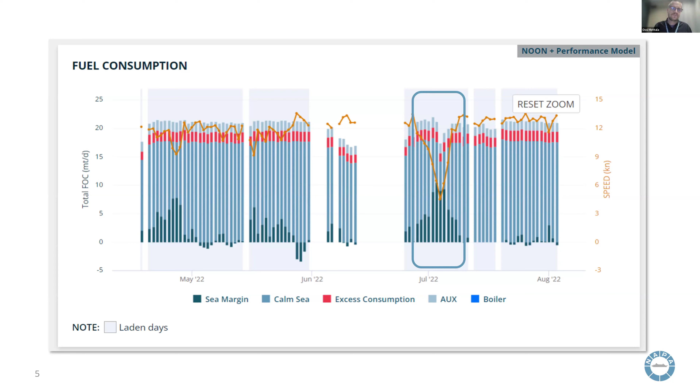Next, following up the trend lines of the vessel, here we have a consumption trend line, mainly hull fouling, and how over time, as we all know, the performance of the vessel does tend to go down. It's decreasing day by day, ever so slightly, and at some point there is a time for underwater hull cleaning, inspection, or dry docking.

Quantifying the impact and how much excess my vessel is actually consuming gives a lot of guidance for technical managers, for example, to make educated decisions on which vessels require my attention, where are the biggest influence gained if performing an underwater hull cleaning, for example.

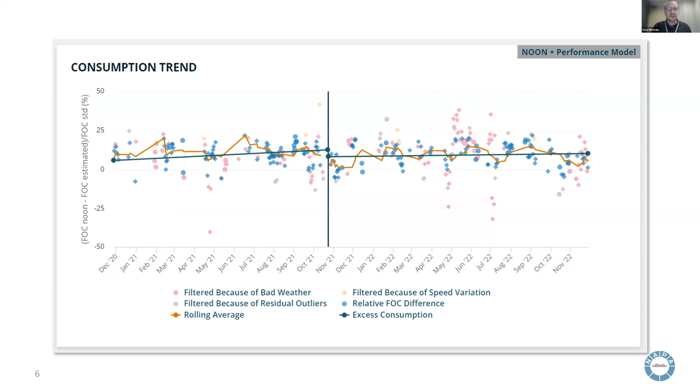We can see over time the trend lines have been growing. The vertical line, the breakdown around November 21, is a hull cleaning for this vessel and propeller polish. We can see immediate impact on the consumption has dropped on the trend line.

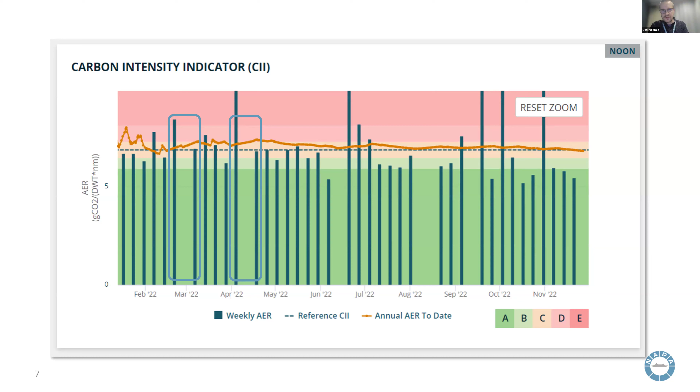If the vessels remain stationary for a long period of time, it means it is still consuming without covering any distance, thus directly hurting the CII rating, and also increasing the risk of hull fouling, the growth on the hull. So the best medicine for the CII is to keep operating constantly.

When it comes to optimizing the operation of the vessel, weather routing has a key part, not only for reducing consumption but also improving your CII rating. This weather routing is almost like attacking CII from two different angles. First, the weather routed routes are often longer, while the overall emissions are lower.

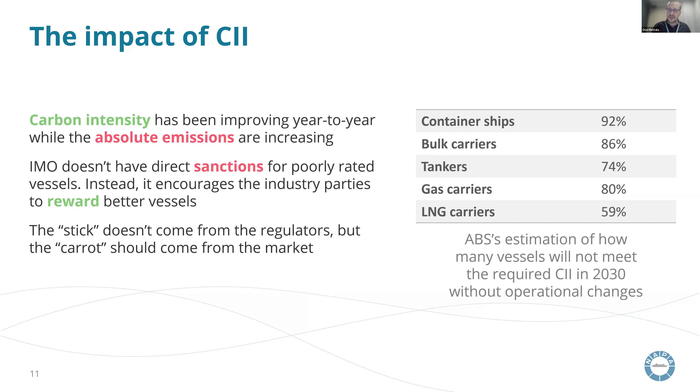But then what are the market mechanisms to improve on this? As we've heard in the news many times, the acceptance of the CII rating clause in time charters has been quite poor, and it was late 2022 when BIMCO released its CII clauses, which wasn't exactly well received either by charterers or owners. In the end, the beauty of CII is its simplicity, but that's also its curse - it doesn't consider off-hire, ballast voyages being much better than laden voyages, etc.

But as we know, the importance of Scope 3 emissions has been growing, and it's expected that cargo owners will start to demand better CII rated vessels when transporting their goods. So in the end, it is transparency that is the key for CII success.

When improving the CII, it should only be a byproduct of improved operational efficiency and reduced emissions - when a measurement becomes a target, it usually ceases to be a good measurement. So step by step, with increased transparency, we can generate more demand from cargo owners, which is an incentive to add the CII clause to charter parties. That creates incentive for ship owners to improve technical aspects and for charterers to improve operational ones. Those result in reduced greenhouse gas emissions, and in the end, the CII rating will improve.

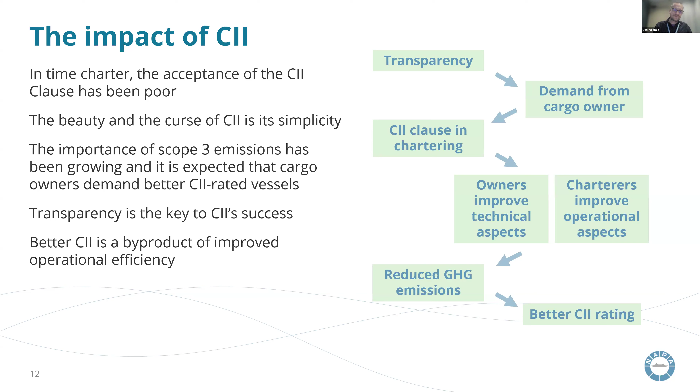So my final takeaways. Operational improvements are a big part of the solution. We are still waiting for alternative fuels to break into the market. DNV estimated that 35.4% of the results in getting to the IMO 2050 target comes from operational improvements.

The acceptance of CII has so far been quite low, and it is not yet an integral part of charter parties. Finally, CII is just a yardstick to measure efficiency - it's by no means perfect, but the motivation to reduce greenhouse gas emissions should be the primary target, not reducing the CII rating.

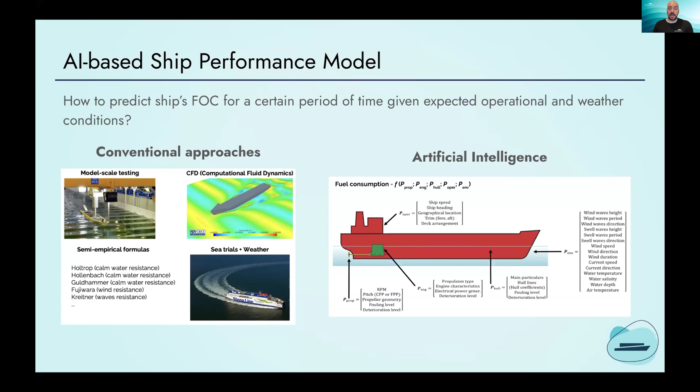And this is what we believe is one of the key advantages of AI: the added accuracy from these types of models. There are two types of models that we're developing at Bearing. One is the ship-specific model, and it uses the historical fuel consumption data, AIS data, and the weather data of multiple voyages of a single ship in order to create a model that is capable of predicting fuel consumption for

that particular ship. Now, it's important to stress here that this type of model is applicable only to the one ship it was trained on. It cannot be easily extrapolated to other ships because it's intrinsic to that particular vessel. So we basically need historical data from that vessel in order to create and use this type of model.

These models can be very accurate depending on the quality of the data that they're trained on, the size of the data set, etc. But we have seen in practice accuracy above 98% in predicting fuel consumption using these types of models.

Now you might wonder what happens if I want to see the fuel consumption of a vessel that I don't have any historical data for, either because it's a vessel that I just chartered in, or for any other reason data is missing or has not been collected. For those cases, Bearing has created something that we call a universal model. A universal model is capable of predicting fuel consumption for a vessel that we have not seen any historical data for.

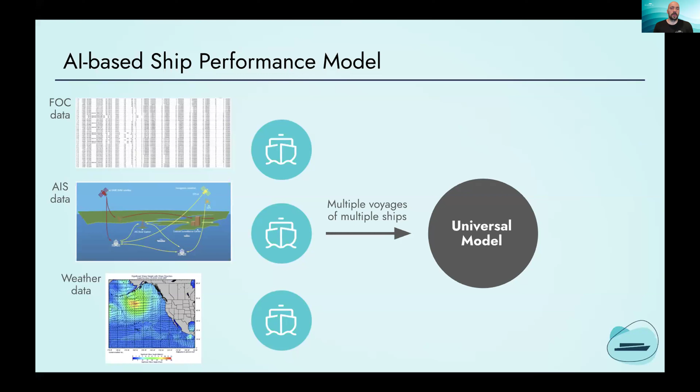Basically, it was trained in a similar way as a ship-specific model, but on data from many vessels. So not on data from one vessel, but on data from many vessels. And by doing so, we have created a model that can input any ship characteristics, any ship parameters, and obviously expected operational conditions, and output the expected fuel consumption.

These types of models are naturally less accurate than the ship-specific ones. Our experience is showing accuracy in the range between 90 and 95%, usually in the lower part of that range, around 90, a little bit higher.

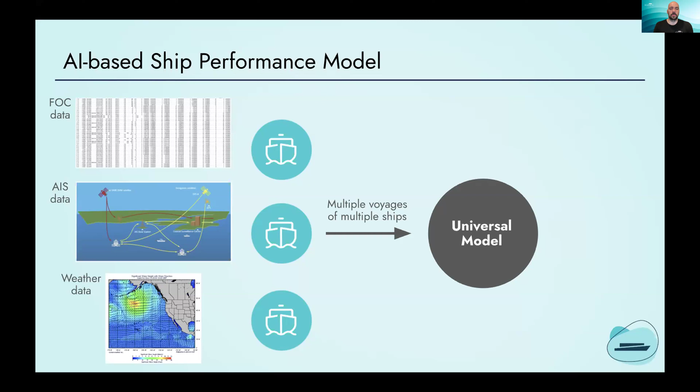And that's kind of a natural consequence of the fact that the details of the ship characteristics cannot be captured without training on the historical data of the ship. But this is nevertheless much higher than what the conventional models would output in these scenarios. All right, so that's a couple of words around the ship performance models.

Then we go next to the large maritime model, LMM, that I was mentioning Bearing is using for the prediction of the pattern of a vessel for a certain period in time. Again, for a liner vessel, this is in a way trivial if you know which service the vessel is going to be deployed to. So there is not much complexity around that, although there still is some,

since in reality pro formas of services of liner shipping companies are not reflecting the actual reality that the vessel is going to encounter in terms of the weather, the routes between ports, the speeds, etc. So there is some complexity there, but the real complexity comes in predicting operations of tramp vessels.

So what we're doing here is building a technology that is based on the same principles as the latest large language models behind ChatGPT and similar services. So it's basically around generative AI principles and methods. We are creating a model that inputs historical behavior of the global fleet, all the vessels in the world's fleet, using AIS data.

We are inputting historical weather patterns, and historical data around global movements of cargo and goods. And we're training a model using that data. The purpose of the model is to predict movement of a single or multiple vessels over a certain horizon of time in the future. Of course, this is very difficult to do. And the longer the horizon is, the less accurate the model becomes.

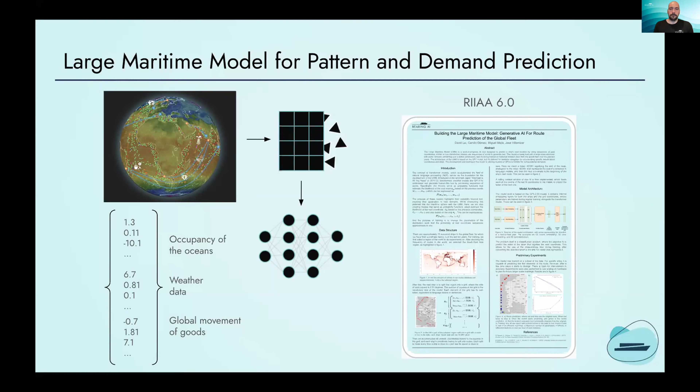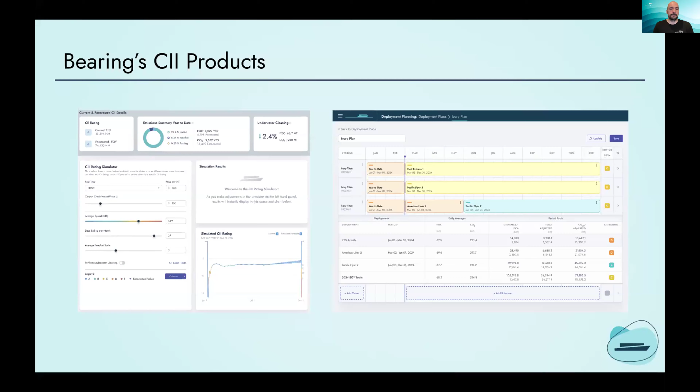I'll take you through a presentation looking at mastering your fleet CII rating. So we'll look a little bit more into the background, understanding the CII levers, and showcasing what solutions we are providing to the market in terms of managing the CII rating. Just to give you a little bit of background about the company, NAVTOR is today serving around 1/3 of the merchant fleet in the world. So we have a fairly large customer base. Our vision is to be a force of innovation and always be at the forefront of the technology, helping the maritime industry towards a safe and sustainable future. So it means that we of course support a lot of products relating to safe navigation, but also supporting sustainability, which CII falls under.

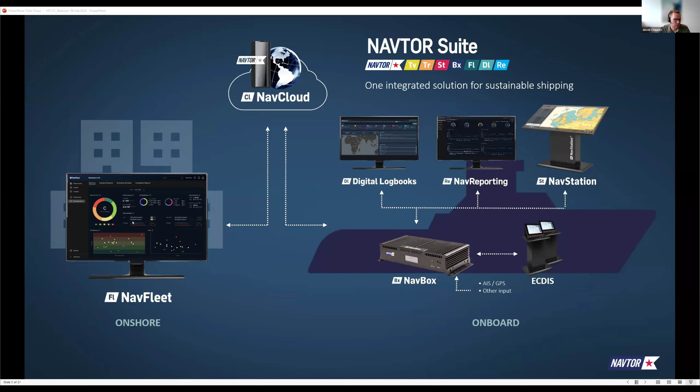And to give you just a brief overview of the solution, we have one onshore solution called NAVFleet, and then we have a cloud solution to sync all the data from our onboard solutions, which is very comprehensive, covering everything from digital logbooks, noon reporting, our nav station, planning station on board, with all data layers connected to ECDIS, and synchronization of all the data, voyages, and so on into our ecosystem. So this is what we do. I will be mainly talking about NAVFleet and the intelligent solutions we provide mainly on the shore side.

So about the CII, just to give a brief background. A lot of people may already know it. It's basically based on collected 2019 baselines. Then there is a 2% reduction trajectory from that.

And then ships are subject to CII rating. They need to, you could say, incorporate this in their SEEMP Part 3. So they need to have a prediction, of course, over the course of the next 3 years, and have an implemented plan for achieving the required CII. So if you're not complying, then you need to have a plan.

I think, as Ossi mentioned, there's not a hard enforcement, but I think it's more the market that would require tonnage that is in a reasonably good rating, so C level rating or better. And of course, the lower figure you have, the higher rating you achieve. So the lower the CII or AER figure is, the better it is.

There are, though, some financial incentives, of course. Some of our customers are signatories to some of these. There are the Poseidon Principles for financing of fleets. Another one coming up is for marine insurance, and this is all about managing your fleet's alignment. So the overall fleet rating determined by a certain system is following a reduction trajectory.

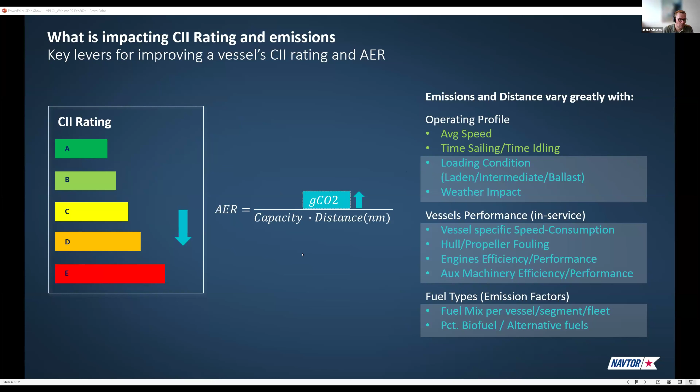If we then look at the solutions we are providing, we are leveraging our emission simulator, our voyage estimator, and an emission and CII dashboard. The emission simulator is very much about the more long-term planning, so planning for a certain outcome. If you want to end up at a given rating at the end of the year, there are multiple levers you can pull to get there. What we can provide in the emission simulator is different ways you can change your operation or your strategic deployment, utilization of assets within the fleet, to get to a certain point.

The other is the voyage estimator, which is more about when you're about to execute voyages, how you execute them, what route you're taking, speed profile, the loading and unloading conditions, the weather impact, and having a clear idea between owners and charterers, so you have a shared view on what CII rating this will end up being, and what the emission cost would be for this.

The other part is the ongoing monitoring. So we have a number of different emission and CII dashboards.

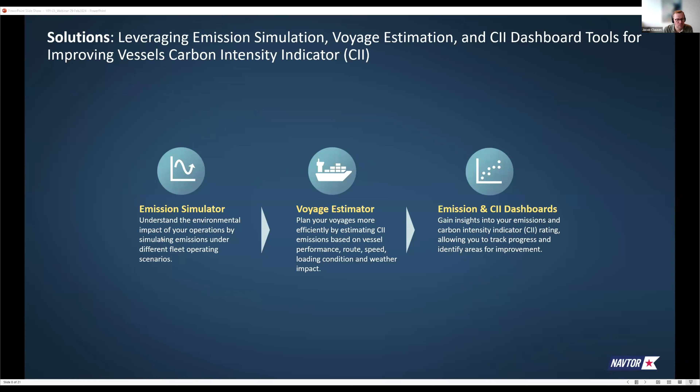So not only looking at CII, but also looking at other emission KPIs. So of course, on an ongoing basis, tracking where are we heading, how is the CII changing for certain vessels, and diving more into that. So in the next part here, I'll jump a little bit more into these in this sequence. And of course, this is kind of circular. When we collect all the data, it goes back to the emission simulator and is utilized again.

So our emission simulator is about harnessing the vessel-specific models we have and the historical data to determine the CII ratings across diverse operating scenarios for both the fleet or the vessel. So the starting point is that we know from history how the fleet is operating, its operating profile. So we have that as a starting point. This is what Alexander called business as usual. If you continue not changing anything, projecting out to the future what you're doing right now, we can predict where you will end up.

The other part is that for a given segment, we have some MR tankers, so they are grouped under MR. So for each segment we can set specific changes. And for this case, we have selected one vessel here where we change what the speed profile should be. Could also be the sailing or utilization. We can change the fuel blend utilized. So we can do that either on fleet, segment level, or vessel level.

So it could be that you have one vessel that you see is not performing. It may just be that it's outdated or old and has less efficiency. So you may want to apply a different strategy for how you deploy that vessel to still maintain a certain level of efficiency. That you can simulate by picking it out and changing just that specific vessel in the simulation itself as well.

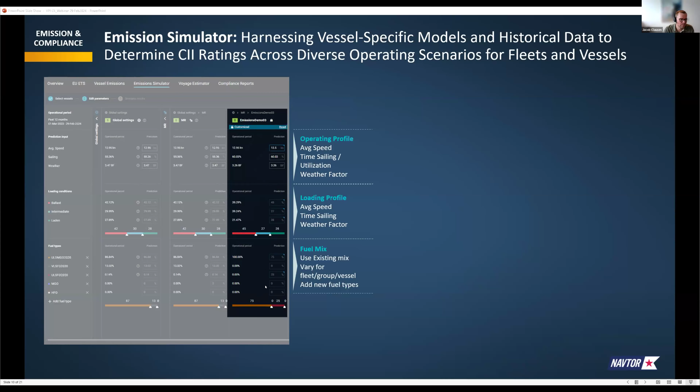And the outcome is that when we have inputted which vessels we want to simulate and the operating profiles to be applied, we then get a prediction on the fleet level, so we can see how the CII rating will develop over time. We can also see a forecast on the annual efficiency ratio, which goes into your Poseidon Principles and so on. We can see some simple emission metrics here that we can also, of course, export.

If we drill a little bit more into the individual vessels, then we can see what will be the rating for individual vessels over time. How will they develop? Because they each have different ways of performing. So we factor in each specific model here, and we can give a prediction out, and you can of course also export.

And for the individual vessels, of course, we can also dive into selecting a specific vessel. We can then look into how this is developing in the projection of what it's going to be doing in the future. Here we also factor in a certain efficiency degradation over time. So there are different levels we can look into.

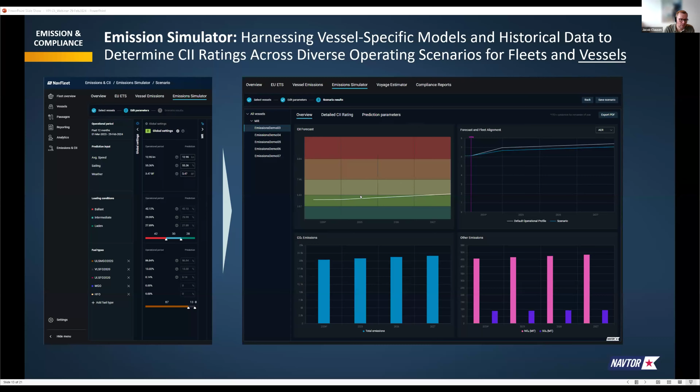Finally, if we want to create several different scenarios and then compare them, it could be that we change certain things so we can see how that would end up, how the rating distribution would be different from year to year, and what it would do to our fleet forecast, our fleet alignment in general.

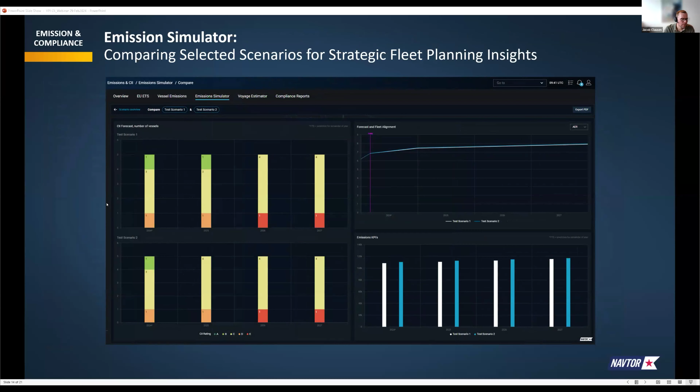Next, I would like to jump to the next part, which is the voyage estimator. So this is very much about analyzing the speed, leveraging the vessel's performance models, and then also evaluating different fuel mixes. So you can add and change the fuel mixes being utilized. The basic input is that, for a given vessel, you select the voyage itinerary and the expected departure. This is of course also relevant in terms of the CII rating, ETS, and so on.

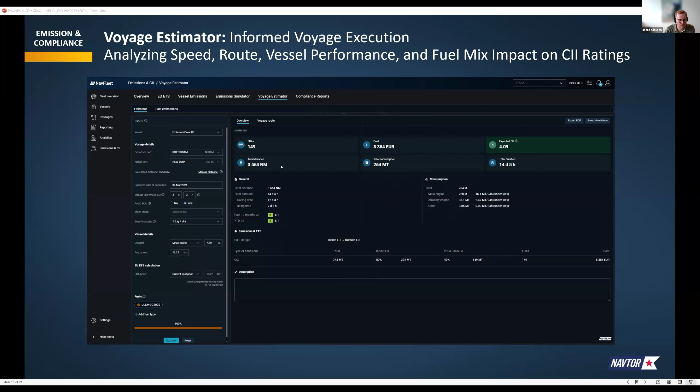A loading condition, and then you have the ability also to say how much idling time it would have. You can also specify if you want to have any EUA costs calculated here, and then of course the fuel mixes, and that gives you your expected CII for that given voyage, as well as EUAs and voyage cost in general.

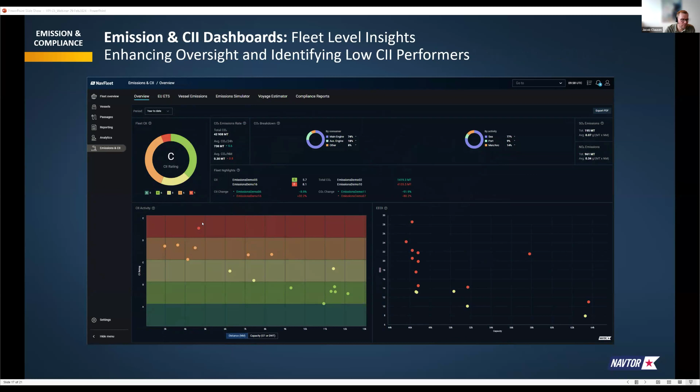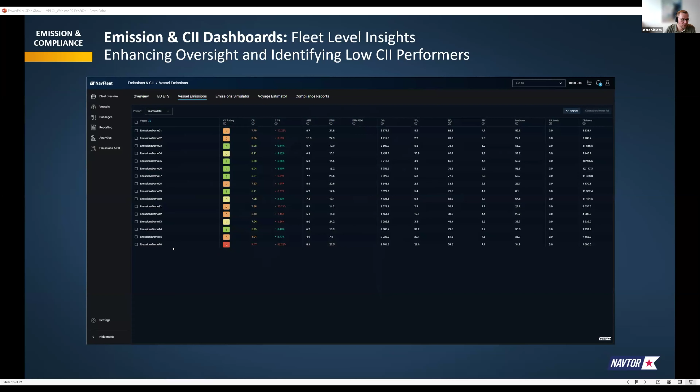The other part we do on the monitoring part is we have an overall fleet dashboard that states, like, it could be the year to date, but we can of course dive into all kinds of different periods of time. This is just one brief overview snapshot of how it looks for a given period of time. Of course, we can drill down and provide more metrics for each individual vessel to make it more specific, and also dive into the low performing.

So this is, all in all, some of the tools and solutions that we provide from NAVTOR's side, and that of course connects up with our ecosystem. So that's all I had for showcasing today.

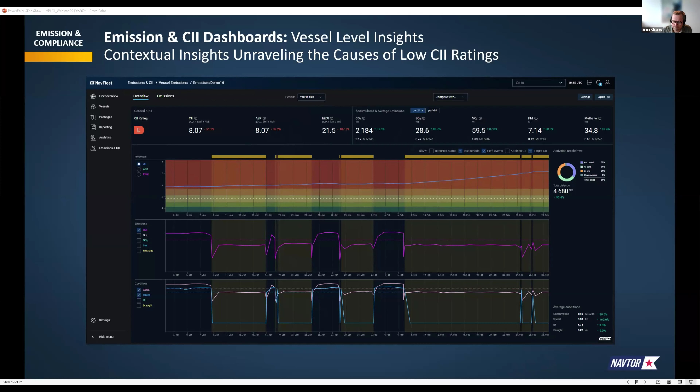I think we've got a question from me. I don't know anything about what the shipping industry is doing with CII. I don't know if anybody is able to talk in generic terms without revealing any secrets, but did you see a massive uptake in customer interest? There's an interesting comment that if your score is a D in August, you're screwed for the rest of the year, which I was quite shocked by.

I imagine lots of companies would be shocked; they probably thought they could get out of any difficult problem in the last month. I don't know if anybody is able to talk about what's happening in the industry in generic terms and how companies are dealing with digital technology. Are they getting the answers and the scores they want? I know it's always tricky talking about customers, not specific customers, but generic customers. Yeah, I can give an answer from our side.

Our experience is showing that there are differences. Some customers find CII very important. Some don't find it important at all. The main pressure comes usually from the cargo owners. So if you're an operator that transports cargo for owners who are very environmentally conscious, and to their customers it's important that their entire value chain, supply chain, is environmentally friendly, then they will find CII an important factor. Those who don't will have less interest.